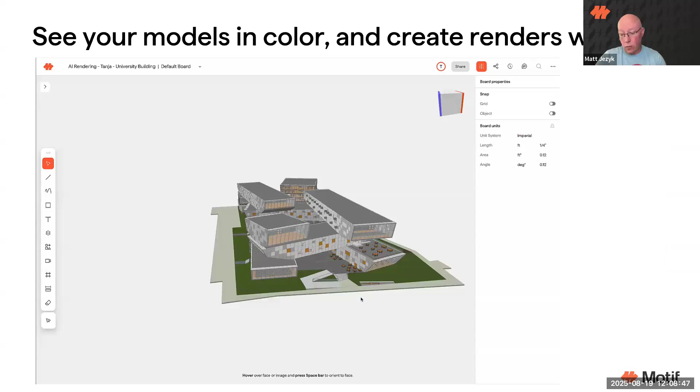The AI rendering, if you guys were around last month, we had a blockbuster month in July. Another colleague of ours, Tatiana, did some great work with her team working on how do we not just add some AI tools, but how do we make them deeply integrated into the customer experience and the product? And specifically, how do we take things that might be possible if you string together five different ways to connect open source plugins together, all this other stuff?

How do you just make it dead simple to do?

The specific thing we added here is a way to create a new visualization, a rendering from your 3D scene. It's a great concept where you can just start by saying render from image, and it'll generate three options for you based on preset prompts, or you can enter your own prompt.

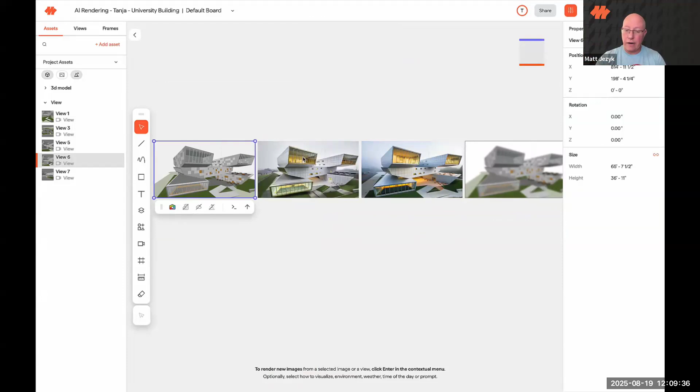The good thing is you don't have to stand up your own technology here, you don't have to play around with different open source models. It just works, and it will create great imagery for you without setting up a whole render pipeline, without having to deal with materials or colors or geometry as much.

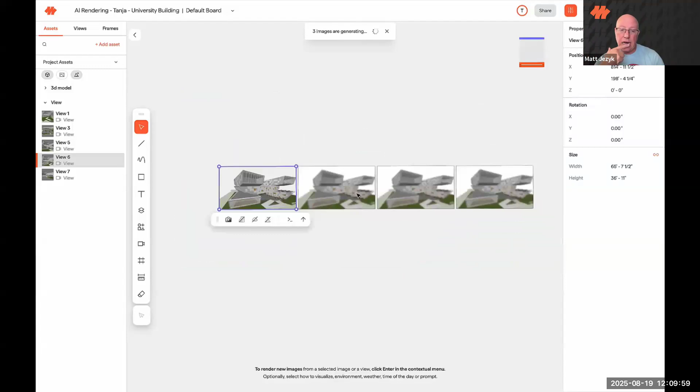The cool thing too is that it won't change your building. It actually maintains the geometry you have, doesn't hallucinate more windows or floors, but lets you get that level of control over the feeling and the ambiance, the perception of the image you're trying to create or the emotion you're trying to generate from the imagery.

And you can do it in a way that's very iterative. Because you're on this infinite canvas, this board, you can do a generation of options and then select one of them and say, take that one and take it further, I want to explore more there. I think it's pretty amazing to see.

So I just love this feature. It's pretty cool, and it's gotten a lot of really great reviews from our early adopter customers and the people using it today. I'd encourage you guys to look at it if you haven't.

So that's pretty fun, you can see some of the concepts there. The other thing we've been hearing from people is we need a way to navigate the model quickly. One thing we have in our web application is a big 3D scene.

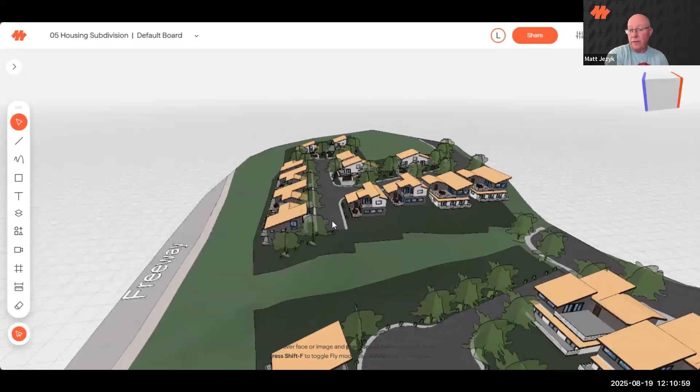Whatever Revit or Rhino models or any other geometry you bring in, you can throw it all into one big 3D scene, but how do you get to the right spot and look around with a little bit more control?

So we took a page from the way the gaming industry and other visualization tools work, which is basically keyboard shortcuts like WASD to quickly navigate through the scene while using your mouse to point, and using other keys to advance and move your position through the scene. So try it out.

It's pretty fluid, and we think it actually helps you get to the right spot in order to collaborate more effectively inside the model. So that's pretty cool.

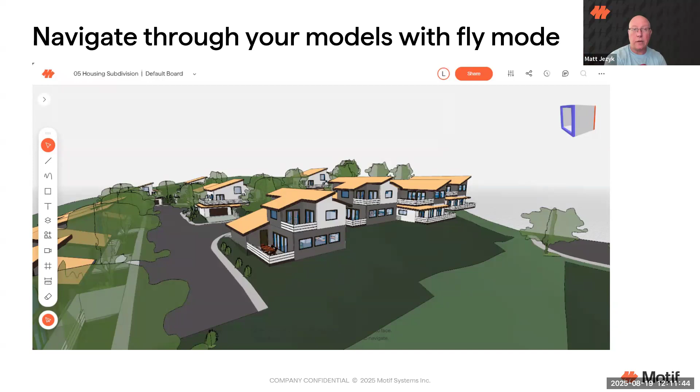The other thing is, in a collaborative setting with an application like Motif, you should be able to share with anybody you want. Bring in your external consultants, your clients, your owner, your roommate from sophomore year in college, whoever you want, just bring them into the system, and it should be inclusive and let people see the ideas you've been working on.

And that's what we've been able to do here. So we have this thing called guest access now, where you don't have to worry as much about restrictions or policies or adding people to an organization. Just share there. And we still keep security and privacy in mind with all of our projects.

So we have ways to lock down the system even more if you don't want to share. And of course, all those things are able to be looked at later on in the organization, like who has access to the system.

So with that, that's kind of a brief spin through some of the highlights we've been working on. But Lilli, what's next? What is coming this month? August has been a pretty big month.

We've been looking for ways to use this data and the models you've brought in to make design reviews richer. You can look at screenshots, you can look at models, but how can you really get inside these designs? So one way to do that was by making materials and glass be able to see through.

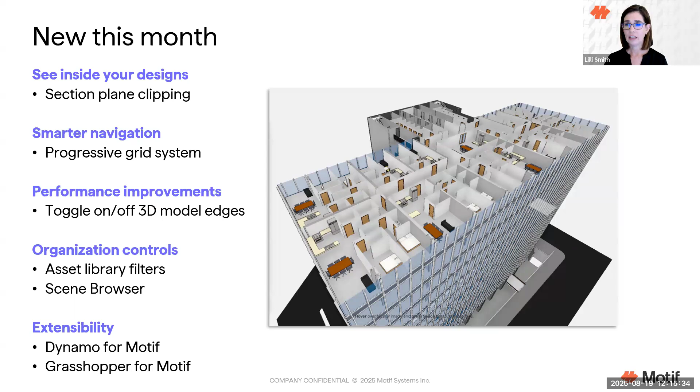And all of this is available - we have a site where we list all of these updates every month. It's at docs.motif.io, product updates. And you can see these are all the August releases. We also have a way to save images now.

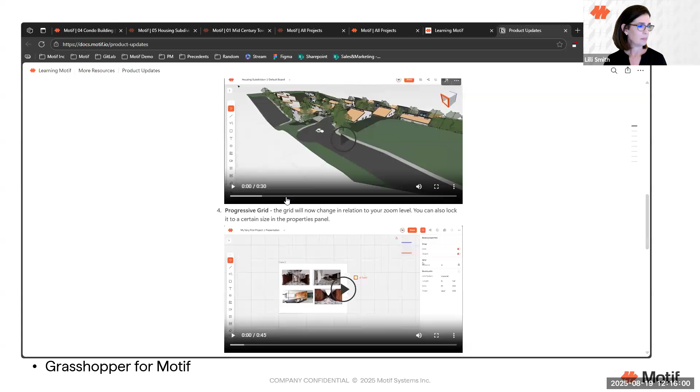All those great renderings that you make, you can save them out, and I'll show you some of these things as we're going. Oh, we also have Revit 2026 support now. If people are moving on to Revit 2026, we support Revit 2023 through 6 now.

We're working on a scene browser, which is really exciting. I was gonna say, that wasn't even in the list. There's stuff in here that is pretty amazing, and very new. Yes, baked fresh daily, literally just coming in hot. It's hard to make these lists because we update them so fast.

I just want to stop you right here because, Motif as a company, we've been kind of told, like, you guys are humble. We're proud but never satisfied, is what Amar says. This is an amazing list. There's a lot of stuff in here that might not be as big as the AI rendering, but from a functionality standpoint and just from a raw usability of the tool, these are pretty amazing improvements you've been working on. Yeah, it's pretty exciting.

So let's jump into looking at section tools in a little bit more detail.

Okay, so this is Motif, and this is what we've just released today. I have a model here that is a condo building - this is a bunch of condos. It also has some rendering over to the side, but we'll focus on the model for a minute. And if I want to see inside this building, I can now use these...

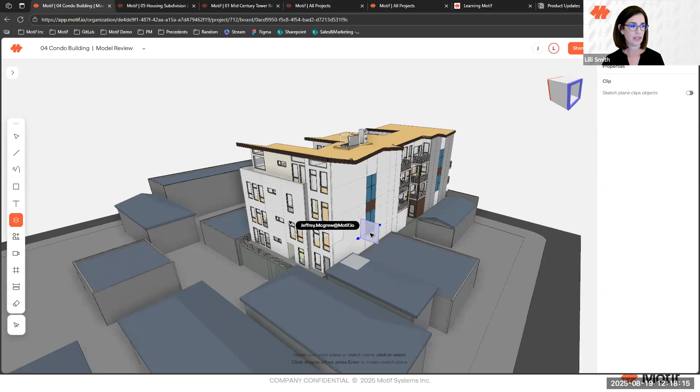So I've picked this plane here, and I can turn it on so it will clip the model. I can flip the direction for which way it's clipping, and I can also adjust this plane here. So this is useful if I want to see stuff like - let's look into this space and see...

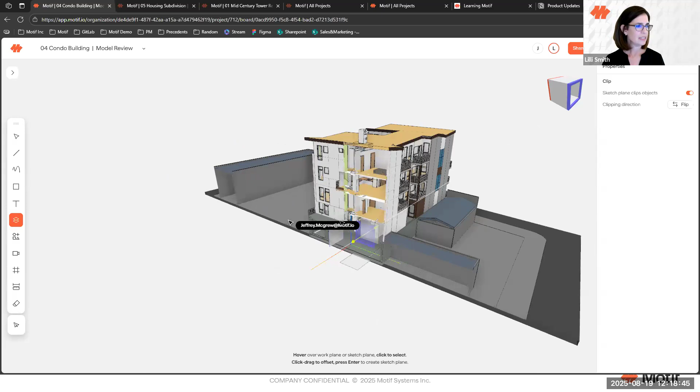I have a roof here in this model that is angled. And maybe I look in and say, understanding this building, I look in and say, oh, these walls are not going all the way to the top here. Maybe there's some opportunities here for creating more storage space.

And I can actually come in and start to circle this, make a note here, and say let's check this out and see if we can maybe use this space. I can make a comment here and say let's check into leveraging this space for storage.

Many people's first question is, can you have two section cuts at one time? And yes, we can. I'll show you now—we can pick off of this model.

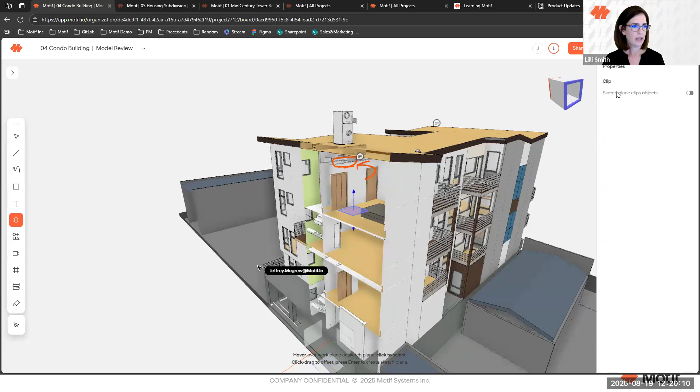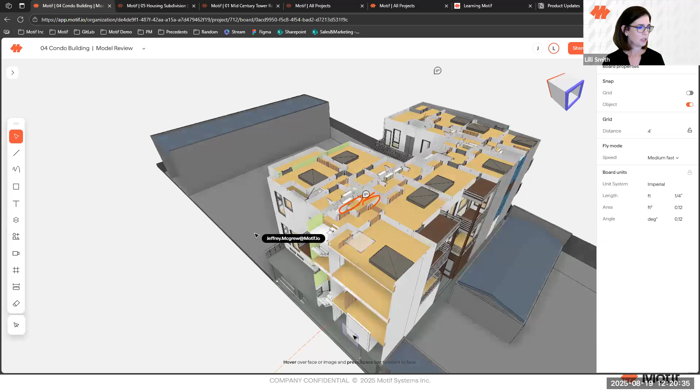Any of these, you see this little blue box—I can cut off of any plane, any of the geometry that's in this model. So I'll pick this floor here and say that this is also going to clip. Then I can raise this up and start to understand these layouts, maybe how they connect to the circulation, how they're adjacent to what, and I can continually manipulate these to keep cutting and keep understanding how this building is connecting.

This is pretty quick. So there's a couple questions coming in about sections and clipping. The first question is, what about solid clipping with poche? Seems like I'm just seeing the mesh interiors, is one of the questions.

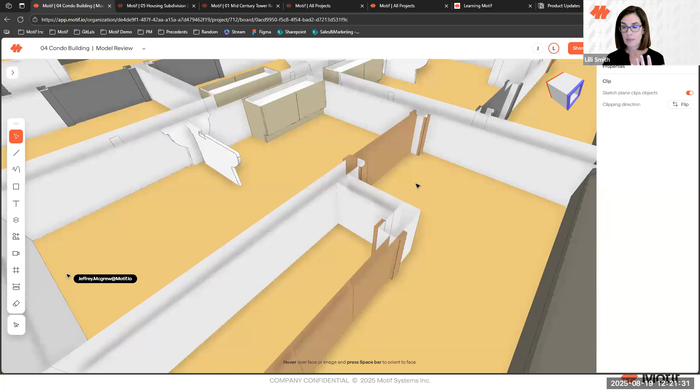Yes, that is a good question, and that is something we are still working on. We're working on this notion of being able to—right now you can kind of see through where we're cutting, and there's no section filling in poche like you'd probably expect to see. We're working on that. We want to get these tools out and get people giving us feedback on them. That's kind of why we're putting it out without the poche, but the capping is something we're definitely working on.

That's pretty common. Even back when we did the stuff in Revit, the section box for a couple of releases didn't actually make a section, didn't cut, and didn't make a resurface on the box. Same thing with other tools.

It's very common in 3D computer graphics to clip things. That's why it's called clipping versus sectioning—you're just turning off the stuff you can't see, turning off the triangles that are outside of this space just to see inside of it. The literal initial use case is: I want to see inside my building, get rid of the floors, get rid of the roof, just see inside so I can start marking it up. So that's what we're trying to get to.

Making it beautiful with really good graphics is definitely something we know how to do, and we're working on it.

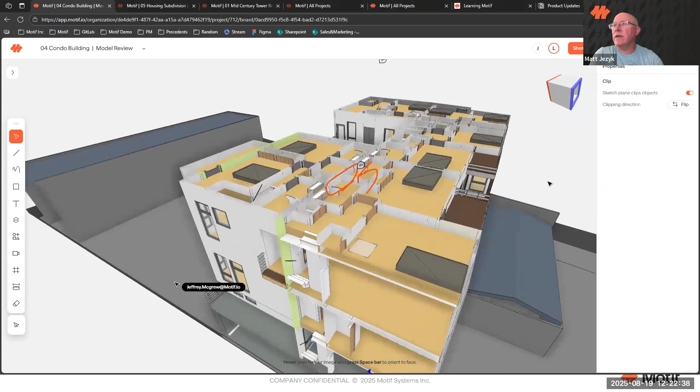One of the other questions: are cameras saved with sketches? I guess if not, we'll get very confusing about what they're commenting on. So in Motif, you're in a thing called a board, which is like the infinite canvas, and you have objects in that scene—3D models, 2D stuff like images or markup objects. Those all exist in the scene, in the board.

The views we have are literally just like cameras you can switch between, like a keyframe animation, but it doesn't really change the state of what objects are visible or not. So if you're marking up on one side of the building and I'm marking up on the other side, all those markups exist in all of your views because they all live on the same board. I think that is the question.

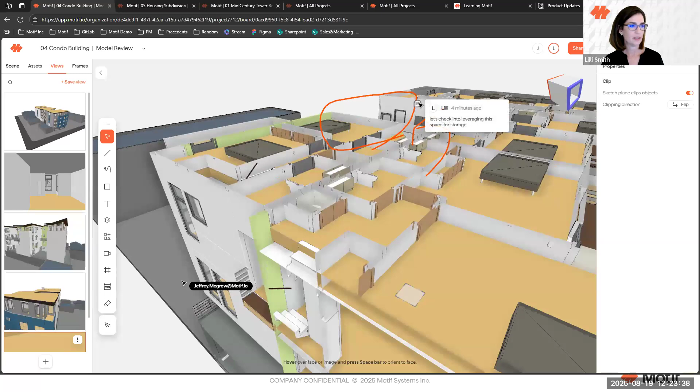If the question was about whether making this comment saves a view—it doesn't, but I can hit V and save a view to go back and highlight that this issue is something I want to look at in terms of leveraging this space for storage.

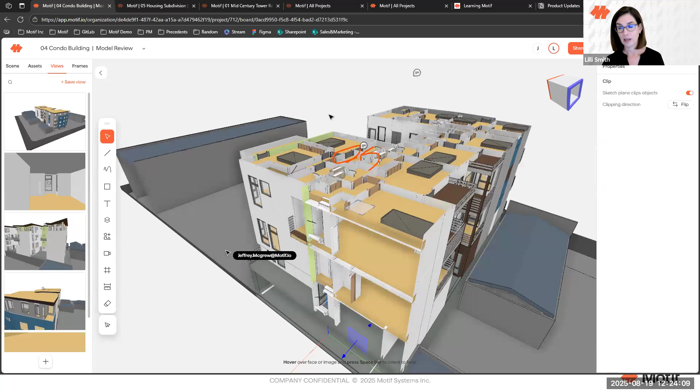Also, an important thing to mention about these planes is that our sectioning right now will not persist. So if I refresh, this is a temporary thing for my exploration—these section planes are actually going to go away. We are working on being able to persist those in the back end, making them work with multiplayer, and that is something still coming.

Awesome. Some of the questions coming in we'll probably hit when we talk about the scene browser a little bit more too. But yeah, let's just keep going. We could jump over and talk about Scene Browser now if you want.

So this is another model that I was going to show some sectioning in. But also in this model I have placed this is our new Scene Browser, which is very exciting, showing everything that is in this scene here.

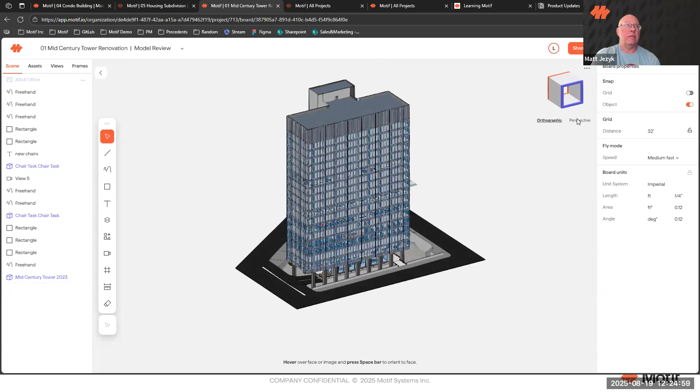I'm going to interrupt you for a second. Can you refresh my memory? What is the difference between an asset browser and a scene gallery or scene browser? What are the differences there? They're both lists of stuff, but why are there two different things?

Yeah, that's a good question. It's kind of the lingo of Motif and kind of the lingo of Figma coming into this a little bit. We're very inspired by Figma. The way that we have defined this in Motif is assets are things that can be used in any board in the project. So when you bring in a model, like this model called Mid-Century Tower, this is an asset that I could place on any board in the project.

Images also are automatically right now promoted to assets. So once you place them on one board, they're available for any board in the project that you can place them on. They're also, if you bring in sheets from Revit, those show up as images and those can be placed on any board.

The scene browser is talking about instances that are placed in the scene on this board that you're looking at. So this is going to cover more things here, like all my freehand sketches are going to show up. Any text that I've drawn here is going to show up. And you'll notice this blurple color, a mixture between purple and blue, we call it.

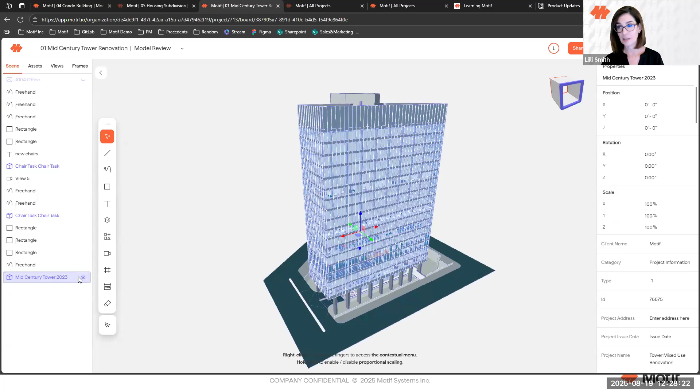We're also going to add a lock here, which is something that a lot of people have requested, to be able to bring a model in and not let people move it. But yeah, this will turn it off and on, which is pretty cool.

I also have, you'll see this little thing up here is turned off. I can turn on this. This is a big sheet that somebody's brought in and actually placed on this floor. So I can pair this with sectioning, and if I want to just...

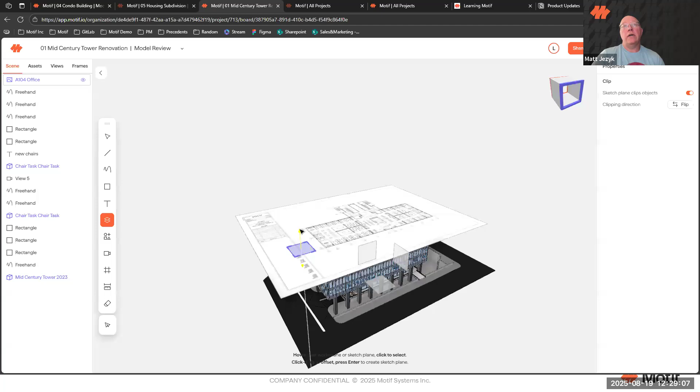Select this, I can select from the actual plane of this sheet and start clipping there. So that I can then just start to understand, okay, what is, I can start to see this together.

Now, it's not automatic yet. This isn't coming in and placing itself at the right spot yet, but we do have the information to do that. We just have to put it together. But it's pretty nice for being able to understand what's going on in this building and kind of meshing 2D and 3D information together.

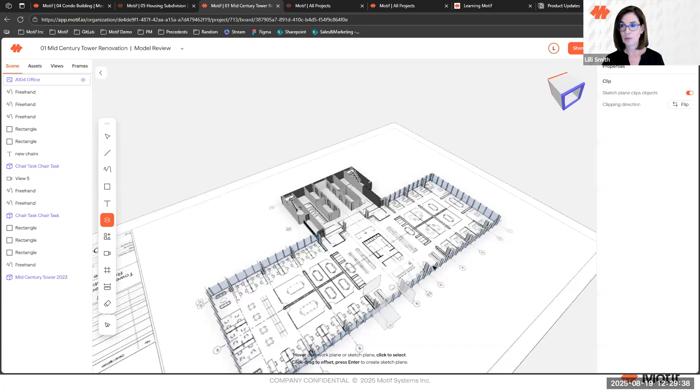I think that is a really cool concept, just combining the two, the 2D and the 3D together. I mean, certainly other applications have done that, but it's amazing to me to think about the number of people that don't quite understand how a drawing set goes together and what the literal sheets of paper are meant to do to describe this 3D design, like this building.

Combining these things together in a real-time interface on the web feels like a good direction to go in. We do have the ability to do kind of basic measuring, using units, though we don't have great snapping yet to snap to this data, so right now it's more like estimation measuring, but that's in the works as well.

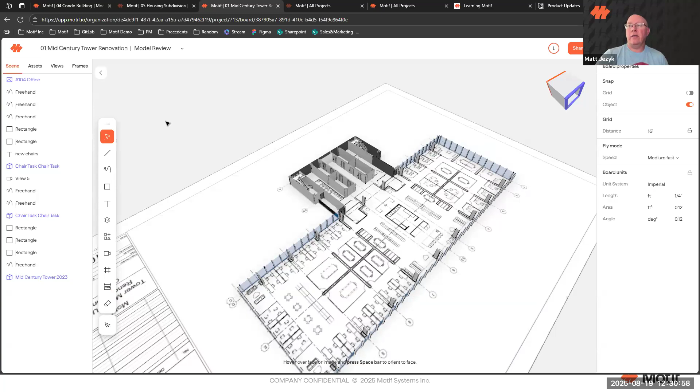Pretty cool. So, other questions? This probably ties back to the scene browser a little bit too. Can I hide specific elements, or is it just a section to show and hide elements? So it sounds like we just answered that one.

You'll notice that this model here is one big thing right now. If you go to assets, you'll see all of these families, which you may recognize from this model, being brought in automatically. You could go and place one of these beds as a separate asset.

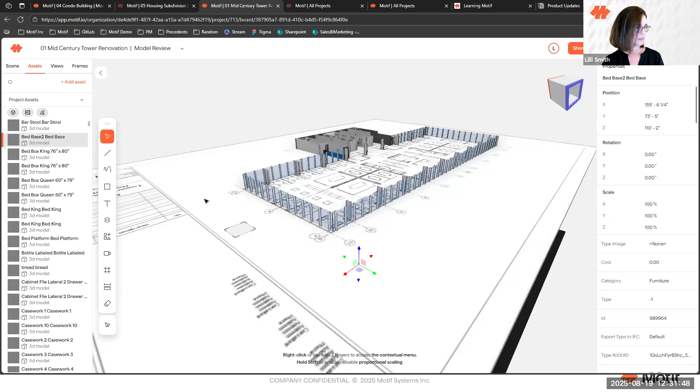Not sure why that's not showing up, but you can place these assets, all of this furniture and stuff that's in the building. Here you can see the chairs. We are going to have soon, in the scene browser, the ability to see into your models, select things, and see their properties, like you can see over here on the right. You'll be able to select things in a model and get a lot more information about them.

Cool. Okay, so there's a bunch of questions, and this is a pretty chatty group in here right now, but let's just keep on going. We can pick up some of these other questions a little bit later.

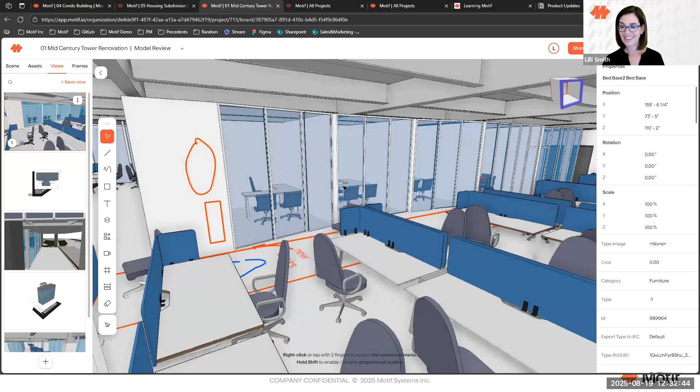Okay, what would you like to see next? There's a bunch of stuff, and the cool thing is we have these teams constantly iterating. Let's go back to that list for a second. The computational design stuff is pretty cool, I think it deserves its own separate webcast altogether. We basically have two new plugins that we're announcing now.

Instead of just Rhino, Revit, and the web application itself, you can now connect to Motif from Grasshopper, a very popular way to drive Rhino, and Dynamo, another very popular way to drive Revit. You could use that to interrogate the model, ask Motif questions like how many comments there are, how many frames, how many views, or start to create stuff like laying out a whole building design or a presentation computationally, which is pretty cool.

The cool thing is you can use that logic to connect to other things, like an energy analysis solution or something else running that you want to push information back into Motif, which is pretty cool. So let's stick a pin in that, this one's a big topic.

Obviously Lilli and I worked on a lot of these tools in our past lives, so they're near and dear to our hearts. If people are interested, those are available on their respective package managers. McNeel has a package manager that's part of Grasshopper called Yak, where you can find Motif.

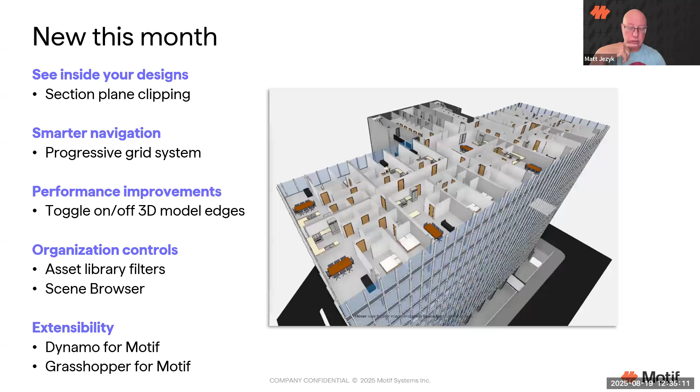So I think the performance stuff, maybe we can talk about that for a second. I don't know if we have a big model showing here, but one of the things we've seen people do - and this happens in Revit and other tools too - is that people are going to model until it hurts, as we used to call it, where they just keep throwing more and more geometry at this.

The interesting thing about the companies we're working with as early adopters is they're like, cool, we're going to do a pilot project that's like an island - geometrically large and also dense with different buildings. So the tricky thing we're trying to do is get performance that's better than a desktop application, but we're doing it in a web application in a browser.

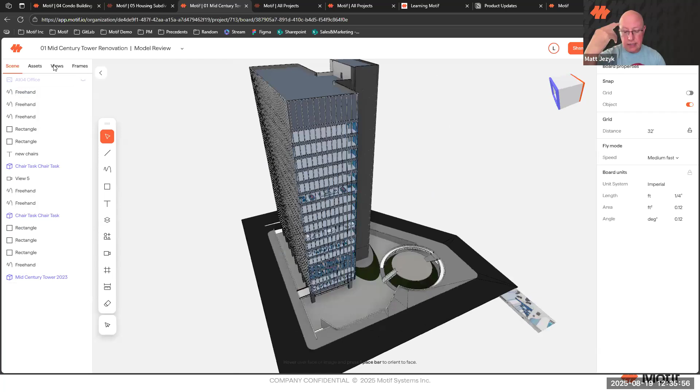That shouldn't matter to end users at all. It shouldn't matter to architects and engineers trying to get their job done, but there are heavy engineering challenges we're working on. One of which is performance - performance of loading the boards, loading these scenes in this big project, which might have five, six, seven, twelve buildings in them that are all individual Revit files.

And then also drawing that stuff as fast as possible. So the graphic display and interactive performance are definitely things we sweat the details on, so you guys don't have to. And if you see things that are slow, let us know.

One of the things we saw is we had people building big buildings and using Motif, big campuses, and they're like, hey, this graphics performance is getting to be an issue. So we fixed that, we sped it up. There's a series of things we're doing there.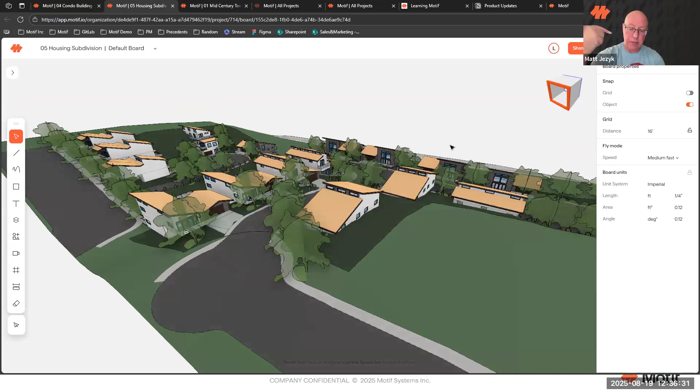The first of which, as Lilli mentioned, is we simply allow people to turn off the edges, the edge display, which has a dramatic effect on performance. And there's other things you see when you start focusing really smart engineers on these problems. So we'll continue to work on those things.

The goal is that it shouldn't matter. It should just work. It should just be like, yeah, I can load this thing on my iPad or load it on my browser and spin this model around. The goal we have is that it should be faster to open these things in Motif than in your normal desktop software.

Yeah, and definitely more to come there. We are working on it to make it better and better.

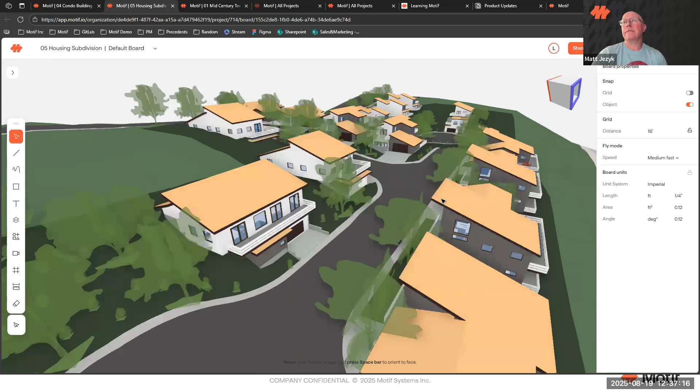This is what it looks like with edges off. You can see if you watch these trees, after we added color, it made it so edges were a lot less critical. In a small model like this you won't really see a difference, but if you're building a skyscraper or a whole city, it definitely makes a difference.

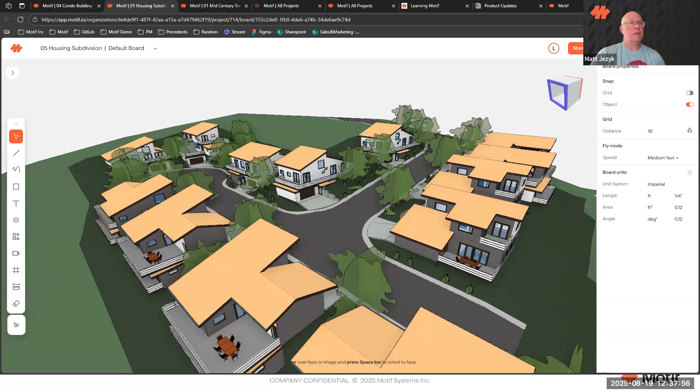So looking at the time, we've got about 7, 10 minutes left. We can answer some of the questions, and we can happily show some more stuff live. Let's see, so just scanning through the stuff.

We talked about this a little bit already, but just what's coming, what's up for next month. We're working, as we mentioned, on section capping. We are working on more details in the scene browser for being able to get inside those models, turn off categories of stuff, and being able to see individual properties.

Continuing to work on our navigational controls, and continuing to work on - we haven't even talked about frames in this webinar at all - but we do have a presentation module where you can create presentations. We're continuing to make that better and better. And then, as we mentioned, we're working on performance.

I feel like that's a good one to dig into in a whole separate session, just the presentation capabilities. There's this idea of I'm going to bring all this stuff together on a board and look at different options, review things, mark them up. So it's a very expansive, like what-if-we-did-this kind of thing.

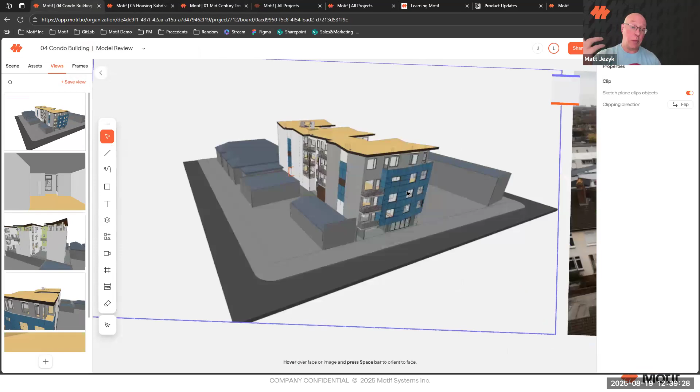But then the other side of that workflow is, what are we going to show the client? What are we going to show the customer? How do we show a refined presentation? People are always presenting - you could be presenting to your peers on a Friday pinup, to your boss, to the principal at your company, or the client or owner or other people. You're always trying to convince people about the ideas you have, right?

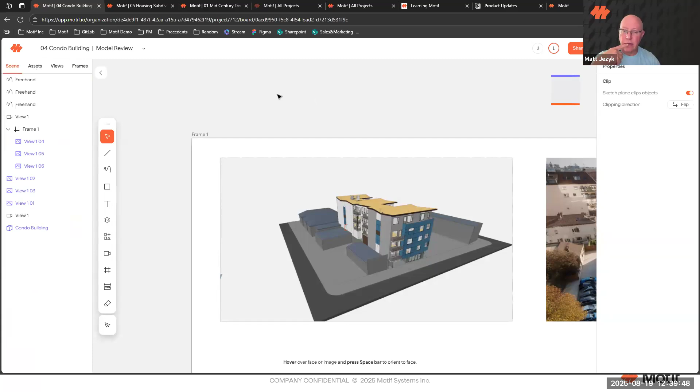So how can Motif be used as that presentation vehicle, and how could that easily fall out of the design process - that's kind of the challenge we've been giving the team. And that's what Lilli's showing right now. So what are these things called frames? What are they and how can you use them?

Frames are collectors. I think people are used to this concept if you're a Figma user or a Miro user. You can make a frame, draw a frame there, and start to put stuff in it.

You could copy this image and place it, move this image from this frame to this frame, and when you put this in it, it'll all move around together. The frames have their own gallery here where it will help you to navigate.

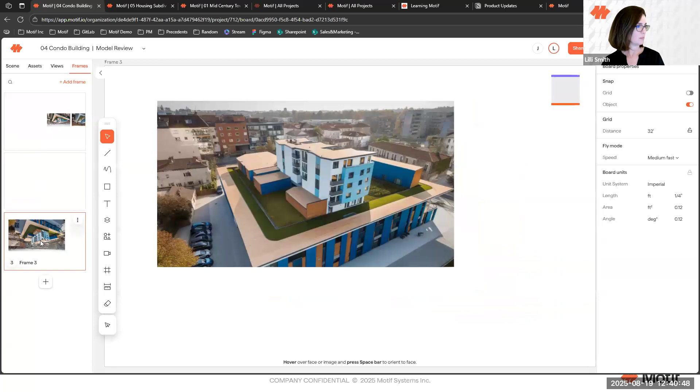Got some problems with things showing upside down right now, but that's how you know it's live and that's how you know we're working in a 3D scene, because sometimes things go upside down. Yeah, this is awesome.

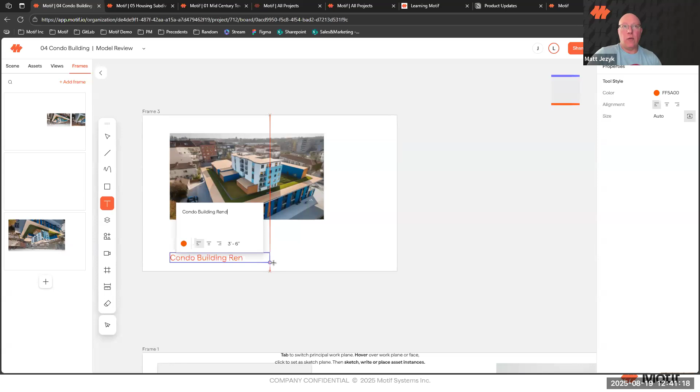So the basic idea is like a frame, if you're coming from Revit, is like a sheet, or in AutoCAD terms, it would be like a title block in paper space. But you can drop in live views, images, text, line work, that kind of stuff. We do hear people saying they want to start creating their own templates and making sure they're the right size. That's all things that are coming.

But the fundamental concept is very much like a container. I want to be able to present something and it should be live - the information is live from the source, like from Motif, always up to date. Or if you're bringing in things from Revit or Rhino, that could be a view or a viewport that you're dropping in live there too. The other stuff, yeah, like you're doing right now.

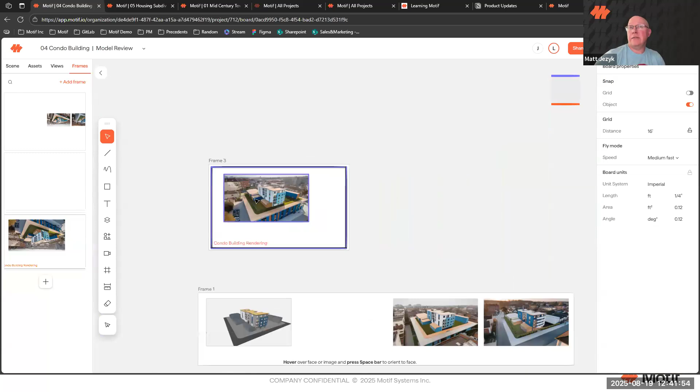One of the questions I got asked last week when I was in New York was, 'Hey, when can we change the color of things?' And we're like, 'Yeah, you can already change the color of things. How did you just change that from the default orange, which we like, to a different color?'

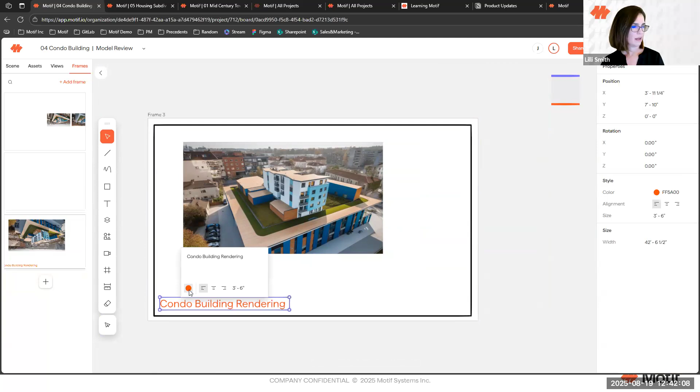So there's a couple ways. Text has a control right here that you can change the color of stuff. Also, the properties panel over here is your friend. It will not only give you color information where you can change the color here, you can also change...

Let's send that to the back. You can also change the size if you wanted this to be exactly 105 feet - you can change it there in the properties.

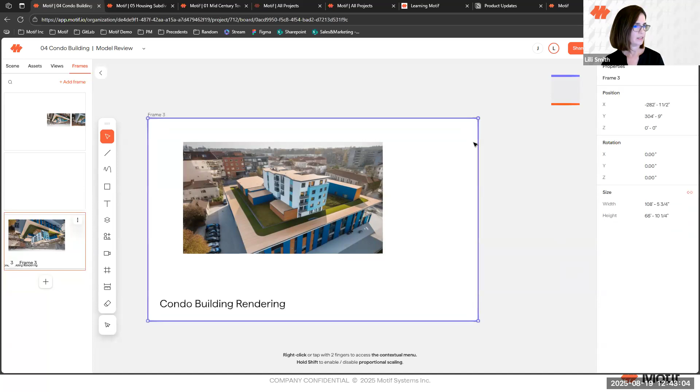And you can also change the line weight of this to be thicker, or if I just want this to be a really thin line, I can make that thin too. I guess I made it so thin that I can't see it anymore. Yeah, that seems like a graphics artifact.

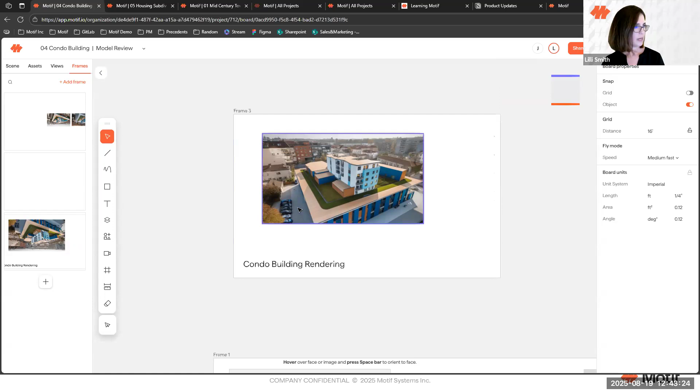So let's see - oh yeah, what happened to the dynamic grid? Ah, I just turned off grid. Okay, so the grid is there, and yeah, we can talk about dynamic grid.

So you can see over here, it's showing me an actual size of the grid, and as I zoom out, that's going to change. So now it's at 240 feet - watch this number right here.

If I zoom in, it's going to change back. Maybe can you try it in a 3D scene? Yeah, so let's look there - so now it's changing, 16 feet.

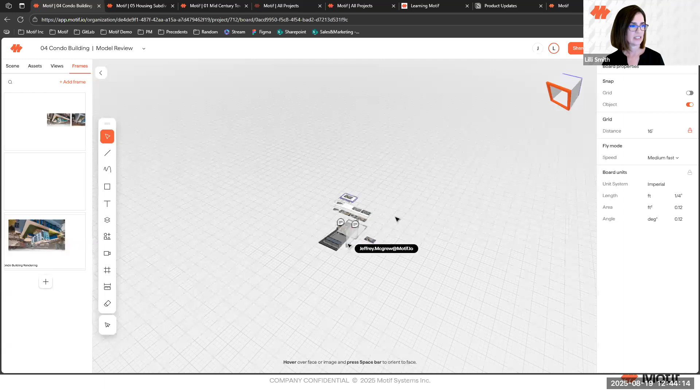And if I wanted to stay at 16 feet, I can hit this lock here, and this will keep it at 16 feet. So if I just have an understanding that I want to see the grid stay at 16 feet, I can lock it to stay that way.

See, my colleague Jeffrey is in here too. Yeah, so Jeffrey's in the model. That's the fun question that came in.

Like, why is now we're talking about units and scale - why is your frame as big as the building? Can you talk a little bit about big stuff and little stuff?

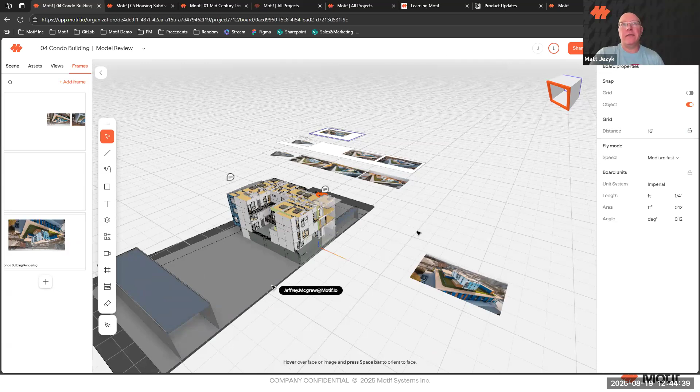It seems like we have something you would present that's bigger than a billboard, I guess. That frame you just drew is almost like land. Why is it 108 feet? What's up with that? What is our thought about that?

So our thought about that is, well, we don't have a notion right now of a separation of paper space and model space. It's just kind of all model space. So we are going to need some kind of notion of scaling eventually. But right now we're just having this notion of units, which is very important for doing design review.

And we kind of have it so you can do 2D things. You could make a separate board for 2D things if you didn't want to see them together. And as I mentioned, the assets work across the whole project. So in this project, I have a sheets review board that I've set up. Let's just look at that.

I think this is how we've been working internally, and we've seen people think about things this way too. So boards can be contextual. I might have a workflow I want to support, like I just want to mark up my drawing set from Revit now, and that's what we're loading. You can have a board for that.

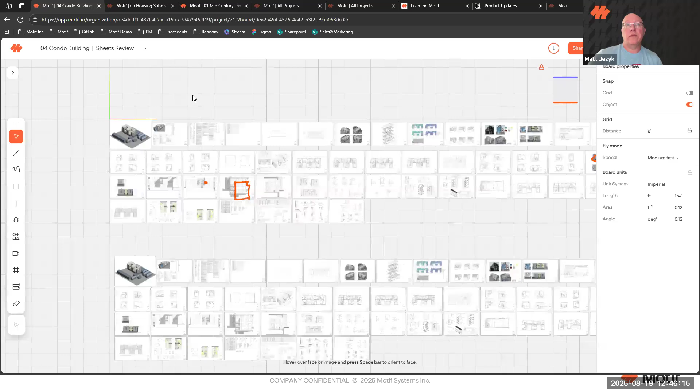Or this is the review session we did last Friday for the entry, so you make a board for that, and then you stream a model into it and start marking up on top of it. These things can be very workflow specific, or like a moment in time, which is what we've seen people do. Like, hey, this is going to be our 80% check set that goes out—what are the changes we have to make for that? And that's all encapsulated in a board.

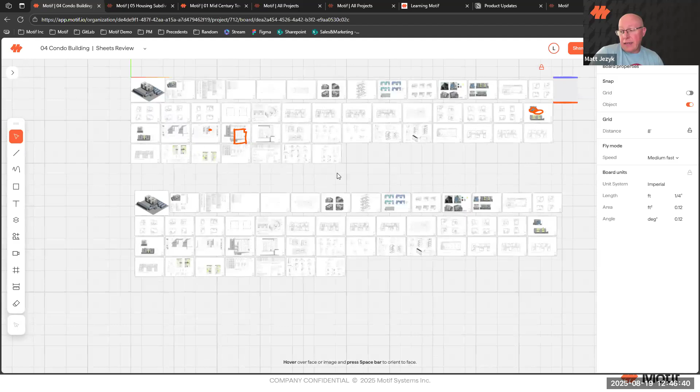And then you can make a new board, a different one, or you can put another version of it right below, so you can compare. That's kind of like we used to say—we're not your mama. We support the base platform; how you want to use it is really up to you. Whether you want to put it all in one big board, that's fine. If you want to make separate ones, that's great too. But we're going to keep things consistent and up to date based on how you use it.

We do have a way to lock this to 2D ortho, so when you open this, it will go to the right board. One of the things we've heard a lot is that there are other tools out there, and if you're used to a different 2D infinite canvas tool, that experience coming into something like Motif should be similar. If you don't want to deal with the third dimension, you don't have to—just lock it in top-down plan view. That basically gives you a 2D experience. So that's pretty cool. In the interest of time, we're going to keep banging out some stuff.

So yeah, dynamic grid—we talked about 64-foot wide boards.

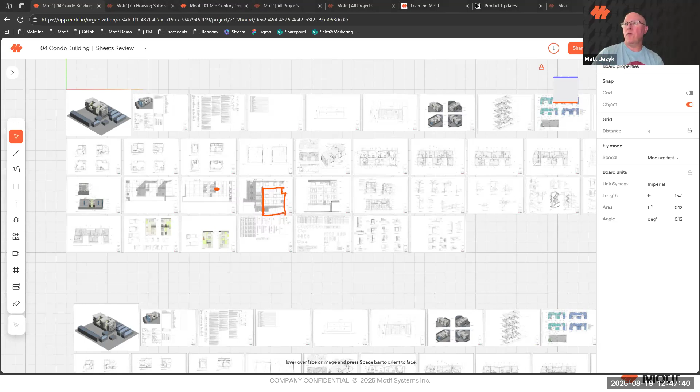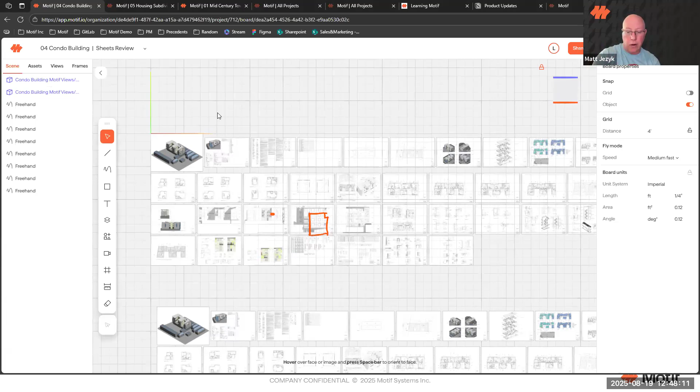Questions about sheets and image quality: these sheets are basically from Revit. They are the live sheets and views from Revit. They do go through a rasterization process—we make an image out of it right now. There's no reason we can't make that vector and more crisp; we just haven't done it yet. But the key thing is they're not dead static exports. They remember that they came from this thing, and if you mark up something or add comments, it'll go back to that source. So that's kind of cool, stay tuned there.

Also, we've heard that for AI rendering—those tools create some amazing images, and the hot tip is that you can export those. Usually the image created by our process is very high resolution, like a 4K image. We're not showing all of that live in the Motif view, but if you export one of those right now, you will get something that's basically print quality.

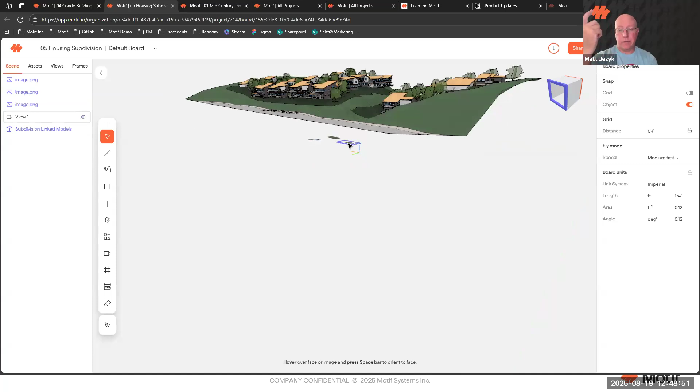Yeah, I don't know if it was on this project or a different one, but remember you had the couple presentation images? I think it was in the condo project. I think I just opened this. Oh okay, but try it yourself.

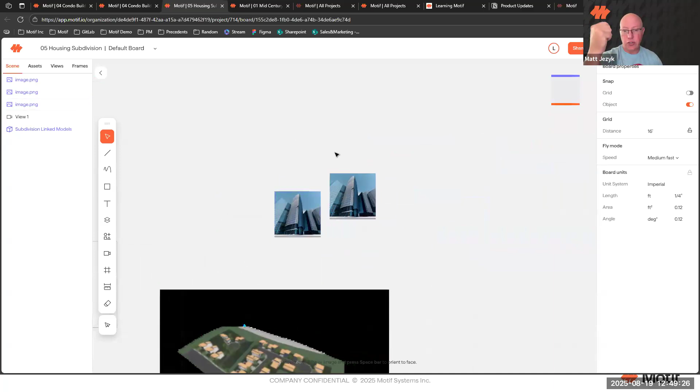An exercise for the reader at home: try and save out an image from the AI rendering, and you'll be pretty amazed at the level of detail. I've seen it down to the individual tree leaves and people and things like that.

It's pretty cool. So a couple other things, just coming up on time—we're actually a little bit over. Will frames be able to have layout guides applied in the background, like grids and columns, just like Figma has? It's slightly hard parsing of English, but it sounds like: how do I get some assistance or affordances to lay out things on a sheet or frame easily?

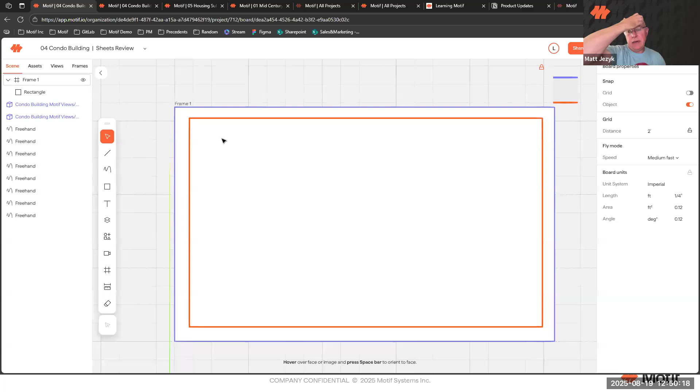Frames have their own coordinate system, kind of like the grid itself in the board. If you start sketching on it, it should snap relative to the frame. We didn't do anything more advanced like Figma has yet, that gives you assistance to put images, sheets, or views exactly in a grid, but they do snap to each other right now. If you place images next to each other, you'll see snapping if you have it turned on, to the corners, edges, and centers of things.

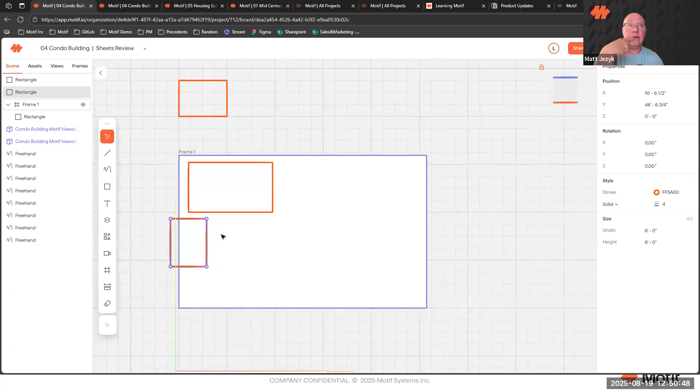Maybe we should show that real quick. Architects are pretty fussy about laying things out. I used to spend ungodly amounts of Saturday mornings, not just marking up red lines, but literally making sure that views and details were laid out correctly in AutoCAD and in Revit.

Let's see if this works—kind of put Lily on the spot here. I think our snapping on frames is broken right now, but you can see these things should snap to each other. Yeah, so getting an alignment there, and we can distribute these things.

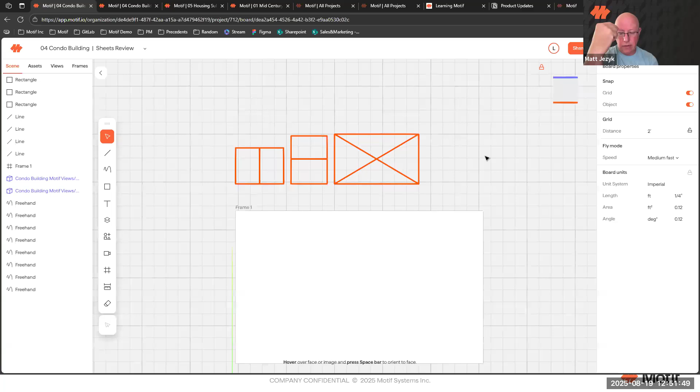Definitely we hear you on that stuff. Lining things up is important, and making it so that it naturally does the right thing is where we're trying to get to. The cool thing is we're building a platform that isn't just about markup stuff—it's about design and building things in real life, which requires a different level of accuracy than PowerPoint, for example. More on that later, but fundamentally, the graphics and geometry we're dealing with will be a lot more precise and have a level of control that you'd expect from a CAD tool.

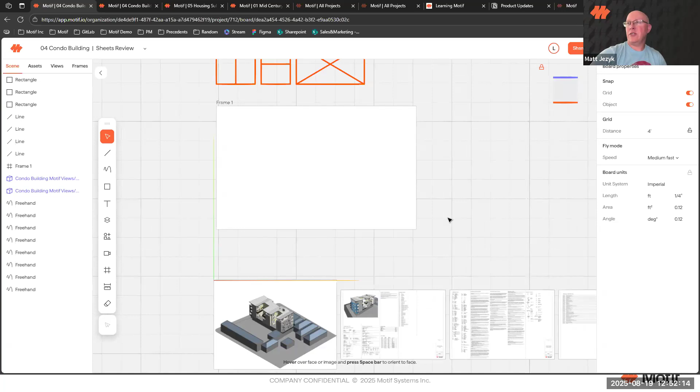Let's see, it seems like we've got a good amount of questions—I see about 17 questions. This is a pretty chatty group. One other top-level one: how do I switch between metric and imperial? This ties back to Lily's units question. So how would I do that for this?

We have it at the project level right now, so if you want to switch the project, you can go back and switch it here. You can also control what you see in terms of length, area, and angle—if you want to see that in inches, feet, or fractional feet.

Yeah, that's good, we answered this one already. So our sheet imports—raster or vector? They are currently raster. They will be vector in the future.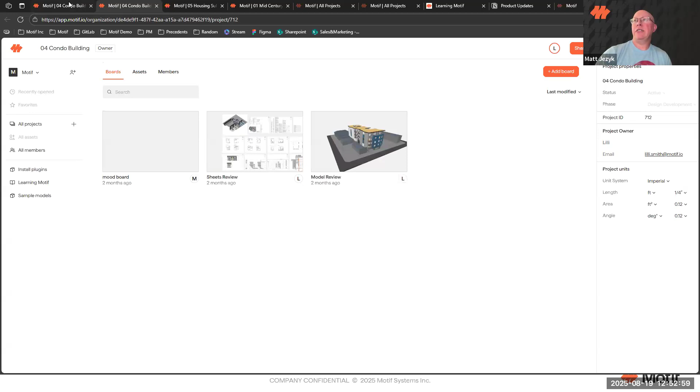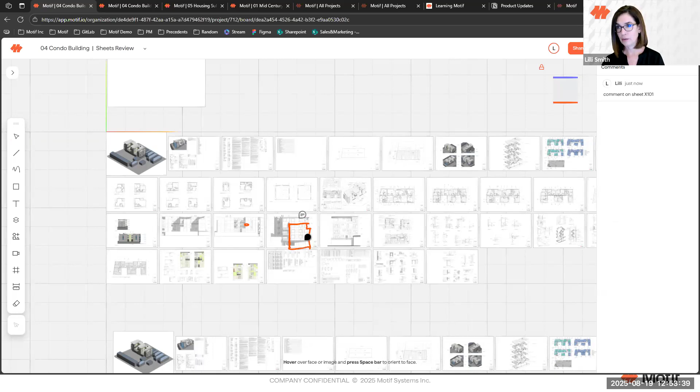Another one related to sheets: how can I send my markups in this thing once it loads? Like that elevation view you've marked up—how do I send that back to my designer in Revit, for example? Probably the best way right now is to send them a link to Motif. We don't send the markups back right now, but we do send comments. So if you were to make a comment here, this comment would know to go back to whatever sheet it is on in Revit if you were connected.

Cool, let's see, a couple other ones here. Some of these are actually fairly conceptual in nature. The layout guides we already answered. Scenes are placed assets, and views are also assets, but views also get their own sidebar, and then the views go on frames, and frames go on boards, and all this exists in a canvas. I think this is more like a terminology question.

More than anything else, it is confusing. I mean, these systems do get complicated, but it's not really that hard.

So we have a project, the top level thing, that in Motif is a project. Then you have boards, and boards are where you lay out stuff. And then you have assets, which are the stuff you care about related to the project. Those could be PDF files, images, SVGs, 3D stuff. It doesn't really matter, it's just your stuff.

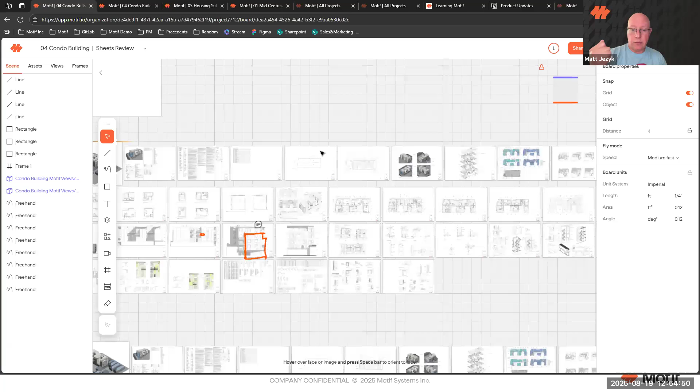And then you can compose your stuff on boards. You can draw things on a board, just markup lines and whatever. You can instantiate things, like taking a building and putting it on a board to make the 3D geometry show up. Or you can instantiate an image, just drop it in. Like here's my Enscape rendering from before, I want to drop it on this board. Those live on a board.

That's what the scene is, it's a little confusing, the term scene versus board, but they're kind of the same topic. They're just the things you can see at one point in time, the active document. Like if you were in AutoCAD, it'd be like the DWG that you had open. It's kind of the same way to think about it.

And then the last concept is this idea of a frame, and frames live on boards, and actually views as well. Views and frames are ways that you can take a particular vantage point of a building, like make a view and save that, and then place it on a frame to make a presentation.

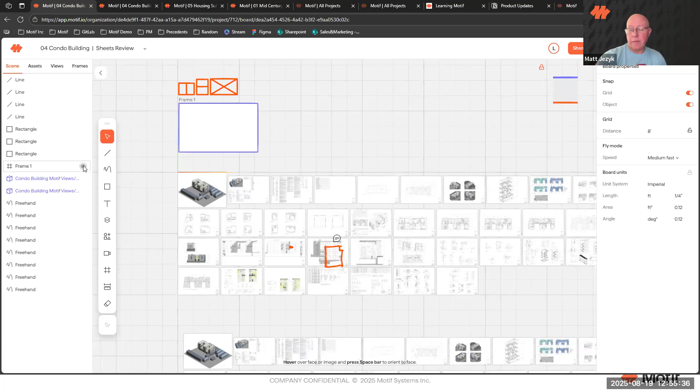So all those things technically live on the board because they're related to the geometry that shows in that board. But after you've made those, you can use them elsewhere in different parts of your project, on a different board. So it's a little confusing, not as confusing as setting up AutoCAD or Rhino or Revit or something like that. We're trying to make it as simple as possible.

But if you have ideas for how to make it simpler, we're all ears, and we're definitely here to listen to those things. Lili, did I miss anything there?

I think you did a good job of explaining it. I think, yeah, it is, it's really a platform that we're making and creating, a lot of terms that some people are familiar with from other softwares, but it does take some getting used to.

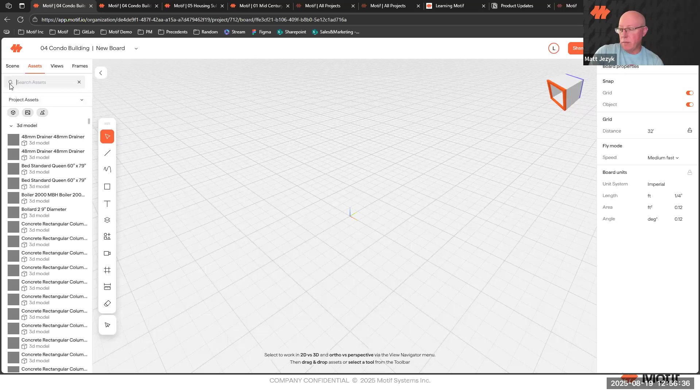Yeah, and that's a trick, we're trying to combine concepts from these other infinite canvas tools, and maybe some of them are commonly used in this domain or not. So definitely help us if things don't make sense.

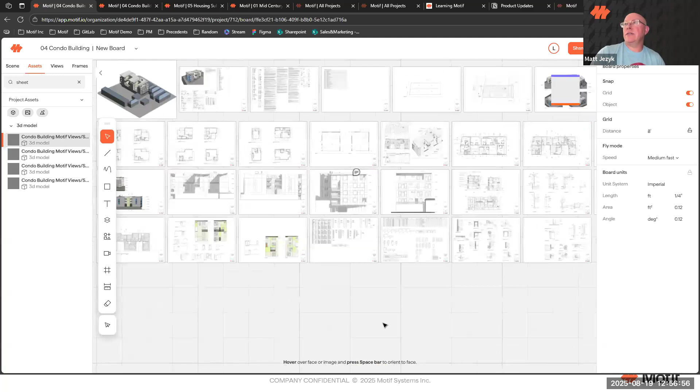Just a few other things, and we're trying to wrap, we're actually a little bit over, but let's see. Oh yeah, display modes. So are there perhaps different display modes beyond turning on and off edges, such as monochrome in Rhino, that would help the model run faster and or look better, present in a simpler manner rather than displaying all colors and all materials.

Like in Revit, there's wireframe, hidden line, shaded with edges. In Rhino, they have these awesome display modes that let you look at the model in more sophisticated ways. Other web applications have similar ways to do that. But what are our thoughts about both for performance, but also for just generating better presentation level graphics? What are your thoughts there?

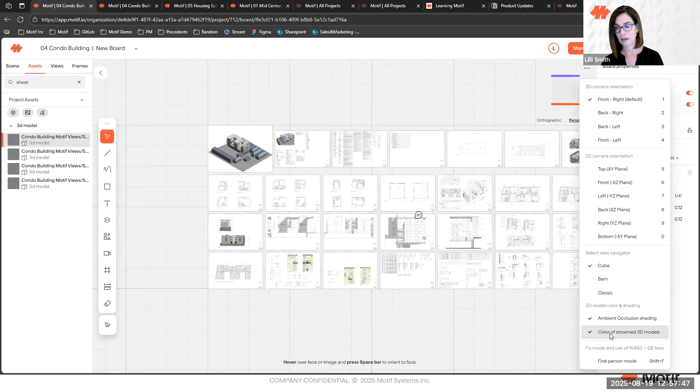Yeah, we don't have too many modes yet. We have the ability to turn on ambient occlusion, and we also have the ability to turn on or off color of the 3D model. But that's kind of as far as we've gotten so far.

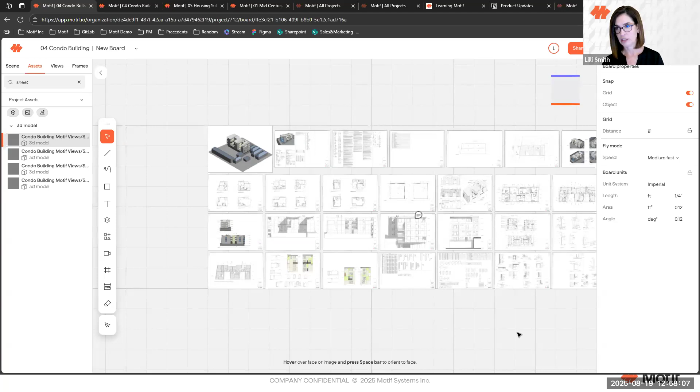We do have on our roadmap the ability to make a bunch of different sketchy style, or shaded, or more textured, that kind of thing. And shadows and lights are another topic in that space, so definitely be on the lookout. A lot of us have this experience from former lives, I think I've built two or three different graphics pipelines on desktop and web, and it all comes back to making things graphically pop.

How do you make it compelling? How do you make really good presentations that fall directly out of the model without having to export stuff to Illustrator and punch up line weights and stuff like that. So we definitely hear you on that stuff. And the cool thing is there are ways to make that really look good and also be fast at the same time, so we're working on that. Shadows definitely fall into that category.

Let's see, so we answered that one. This one, sketching on a curved surface, we can't do that. You can sketch on work planes right now. Can I hide specific objects or just section to show? I think, yeah, we answered that one. Let's see.

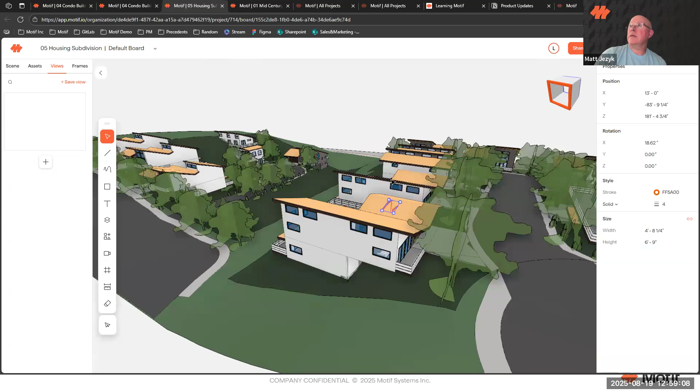Oh yeah, this is kind of a fun one. Probably a good thing to end with, and stay tuned. So these two relate to the scope of your changes.

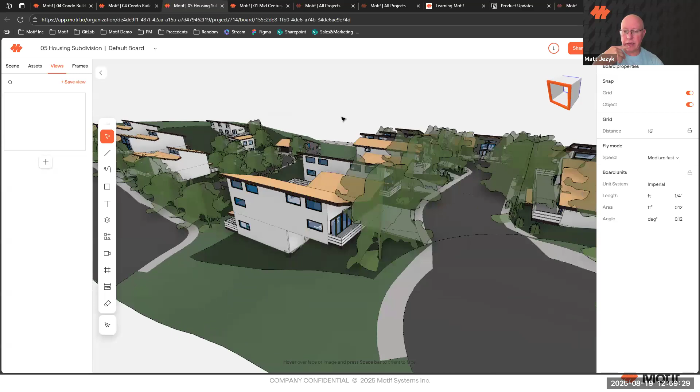So if Lilli, if you added a section in your—this is a multi-user collaborative system, we can be in the same project right now. Our colleague Jeff McGrew was just in this project before too. If we're working in a system that is real time and every update happens, what happens when you add a section? What happens when you turn off the floors? What happens when you modify your scene? And how does that affect other people?

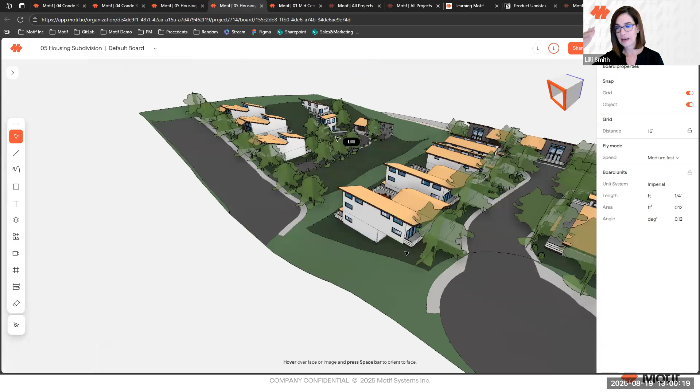Right now it is single user. So I just made a section here to try to understand how this was sitting on this site. But if I open this duplicate tab here, I can see my other self here. You can see that it's not cut there. And that's just because we're not sending that information to our backend yet, so it's not participating in multi-user yet.

But we understand that that is very important, that we want this to be a multi-user experience, that you could have if you wanted somebody else to see your section cut. That's really important, right? And that's part of why we're building this collaboration app. But we want to do it in a thoughtful way—maybe we can have certain views where there is a section cut that is controllable in a certain way, so you understand that view is about a section cut, and I can share that with you.

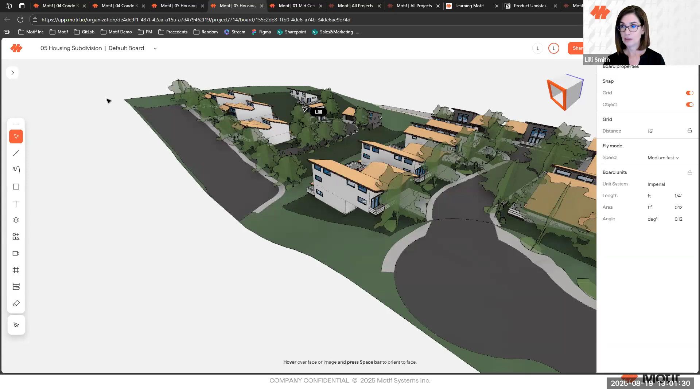And then you can have other views which are not cut, so if you wanted to be working in the same board where I was but didn't want to see your model cut, you could just be in a different view. So kind of similar to how Revit views are—certain Revit views are about section cuts, other views are not. That is the way that we're thinking about this.

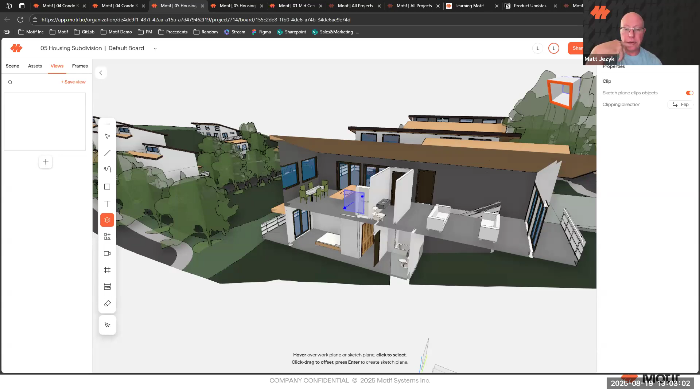I just have to say, it's been amazing working with you all these years. We're kind of old now, we've kind of been around the block a little bit. Speak for yourself. Yeah, exactly, present company excluded, of course. So it's been a journey through the years, and thanks for coming along for the ride in this new iteration at Motif. I really look forward to what you and the rest of the team are going to come up with next. So thank you so much. Yeah, thanks everybody, stay in touch.